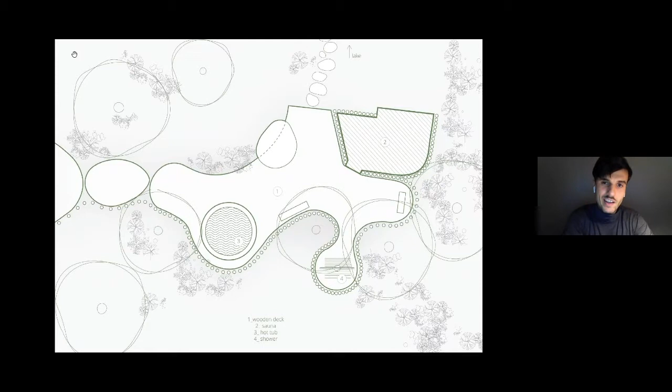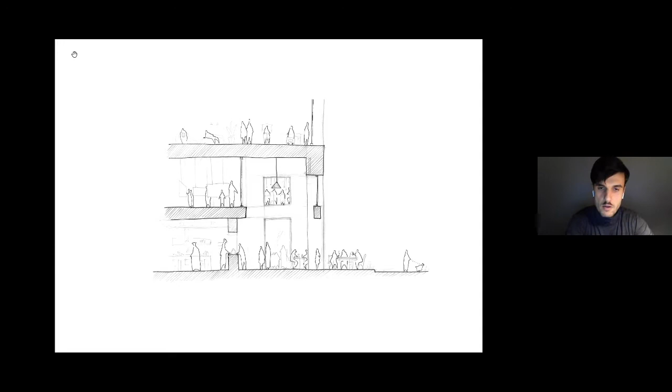So we're dealing with different types of scales, from smaller projects like this one we recently did, an outdoor spa next to a lake that we designed for a hotel nearby in a beautiful natural surrounding. I was inspired by a couple of things, most of all Alvar Aalto's funky shapes of, for example, his glass products. We deal with bigger scale like buildings. This is, for example, a building we won a competition with, a big building in the middle of a park that we decided to structure as a park pavilion with the building on top, so you could walk underneath it. There'll be kiosks and stuff, and then the building was put on top of that. So the bigger scale as well.

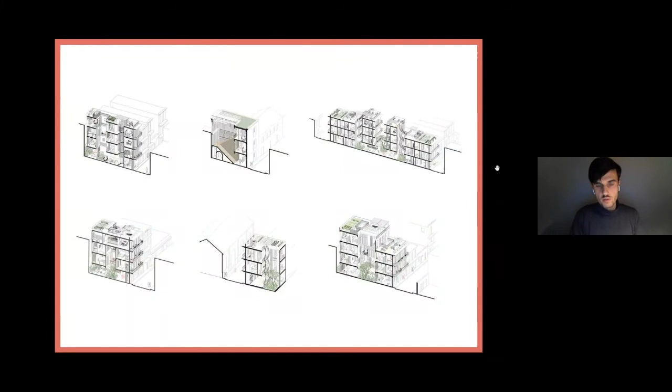And then, as you see, Havana Vieja has a lot of these collapsed buildings, empty plots. We could build them there and not only help Cubans to be connected to the lucrative economy of tourism, but also reconstruct the old town of Havana at the same time. So these plots were addressed with these models, prototypes that I designed for different shapes and sizes, to check how this idea can work spatially. And it's straightforward, very easy. These buildings are also working with Cuban handcraft and passive cooling methods, and other ideas that, again, I took off shelf and tried to figure out which puzzles are gonna work best.

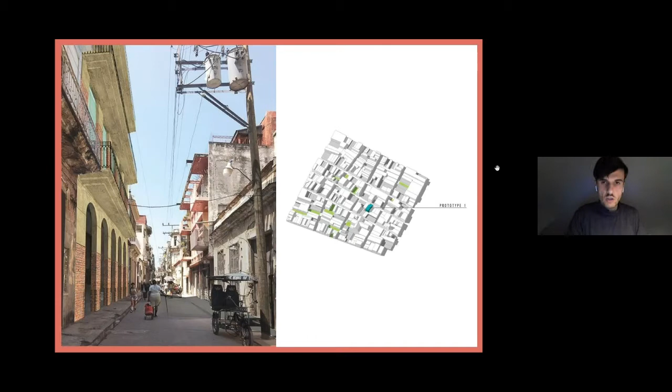Like, for example, Cuban social life happens on the street. So each building got this front colonnade on the bottom, on the front of the building, that during the day can be used by street vendors because they don't actually have a proper place to stay in the old town. But then in the afternoon, these places would turn into zones where you can play domino or just hang out. Spatially very simple.

This is an example of a plan. You can imagine that you have 2 apartments, one here, and 2 hotel units in the middle. And after 7 years, after the loan is paid off, if those families decide that they no longer want to continue that kind of business, they can either create a 3rd apartment and sell it off, or they could incorporate it into their apartment.

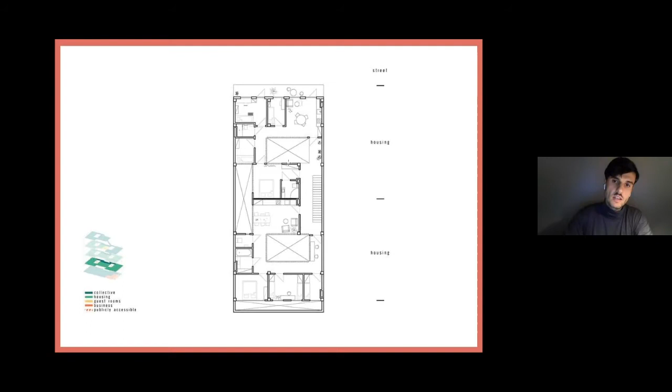When the family is growing, they might need more space. Very simple, no structural changes, just you move a door here and there, and these things can kind of change back and forth between tourism and housing and help to deal with those 2 shortages of hotel units and housing in a more dynamic way.

Again, just taking aesthetically even elements from Cuban architecture that I found the most interesting and putting them back together in a new assemblage that I thought could work nicely. This was the first project that I did this way, that I was looking just for puzzles that I could rearrange in a new way to create new quality, for example, here, new tools to address a kind of social-political problem. I found it to be a successful one.

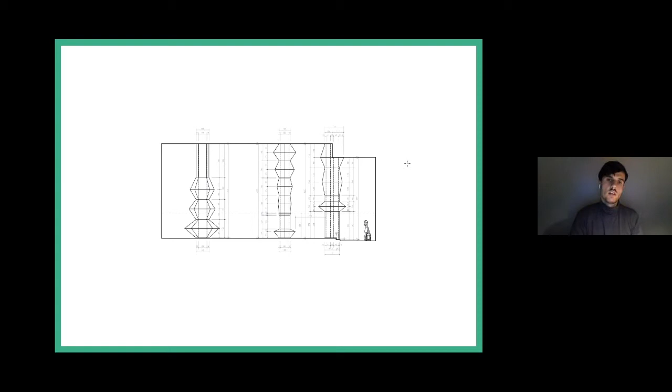And we wrapped these sculptures, these totems, around the structural elements. And this is the outcome. They are almost 9 meters tall, made out of wood and hand painted. It's 400 square meters of hand painted surfaces. We were painting it for 3 months with a big group of volunteers, and organized a lot of video screenings and meetings in the workshop every weekend to talk about environment alongside the work.

So we have topics like quality of air, deforestation, overfishing, disappearance of wildlife, plastic, as I already mentioned, and here in the back is our relation to the environment, our influence on the environment via the choice of the diets that we follow.

Yeah, and they are. We're pretty happy with them, and the project is growing. We're hopefully gonna build more in different cities. This summer we built another one like that in Portugal. You can scan each sculpture to get into the website that will explain everything to you, like what is that sculpture about? You get the links, you get the research. You can go as deep as you want.

And you can see that these are very colorful. So it's kind of like a Trojan horse. You go in because it's exciting, it's fun, it's colorful, but then when you start reading what it means, or a friend tells you, do you know that these actually... it's kind of like a juxtaposition of these two. But we wanted it to be tempting and then kind of surprising later on. These ones, for example, are the ones we built in Portugal this summer for Dos Canais festival in Aveiro.

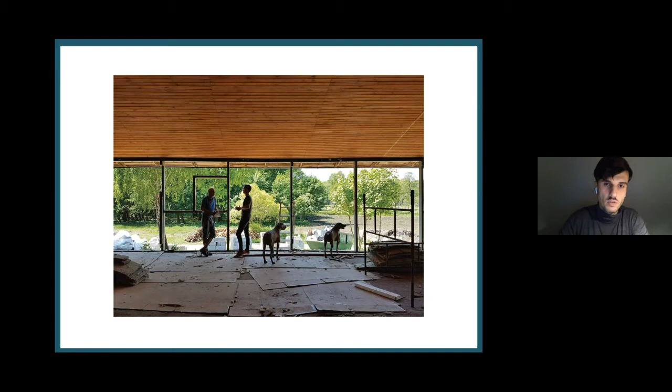So, as I said, this is on hold at the moment. This is what you can see when we took the wall out. This is the structure that we discovered, and this is going to be reinforced with the wooden structure and hopefully finished next year. We had to add a lot of functions inside, but we wanted to keep spatially this typological shape, and we didn't want to lose it. So we decided to take all the functions and put them in the middle of the building and not touch the walls. So we ended up with this box sitting in the middle of the barn.

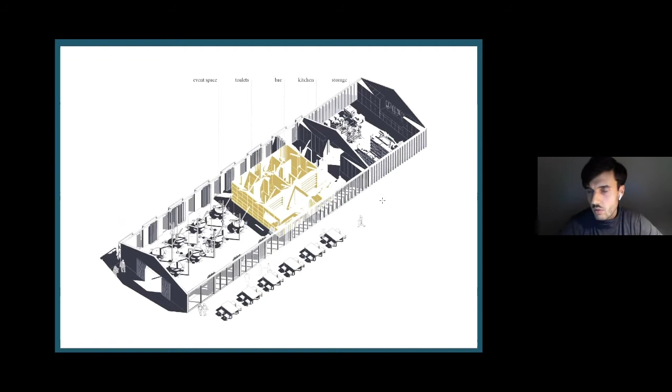The box where you have the bar and the toilet and the kitchen kind of grouped together. And then we asked ourselves, what is a big box sitting in the middle of a barn? And of course, quite a simple, funky, I think, connotation: it's a haystack. So the whole box is going to be built out of hay. It's going to be actually aquariums with hay inside.

But it is a haystack in the middle of a barn that you go into when you want to go to the toilet or buy something from a bar. And to make it a bit more funny, we added a fireplace in a haystack, because why not?

Another one I'm going to share is a project that we're now working on in Tanzania, in Ulyankulu refugee settlement. So I'm a graduate from a school called Wayere, a primary and secondary level school. This school started in the 90s as a scout group that was also a kids theater group, and then morphed into becoming a primary school. And the theater theme remained. Until today, it's a school that teaches kids all the basic stuff that you need program-wise to be a proper school.

This school also uses theater classes to teach you qualities like bravery, honesty, empathy. It's a beautiful, beautiful program of education for kids. And they didn't have a building to start the school in. They got a piece of land from the city, but they had no funds and no building.

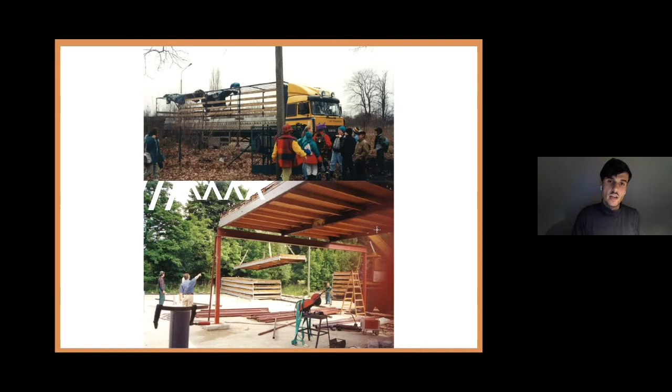So this building that you see here on the picture, and there are the pictures from the construction, was actually a gift from the Netherlands, because they had a temporary school there while they were refurbishing the real one in Eindhoven. After they refurbished that school, they donated the temporary school, and it was brought on trucks in the '90s to Poland and assembled, and it's still being used continuously till today.

So exactly 24 years after the first gift from the Netherlands came to Poland, and we got to enjoy education for so many years in this building thanks to that, we decided as a school to create a foundation. I'm saying we now because I'm a part of the foundation at the moment, but I joined the foundation as an architect after they already decided that there's enough power and this is the time to pass the gesture along. And the refugee settlement in Ulyankulu, Tanzania, was chosen to pass the gesture along and build a school for them.

So I was invited to design that school. It was mostly because at a similar time I finished my Havana project, which was widely published, and I was a graduate of that primary school. Things clicked, and I got that exciting invitation. So I went to Tanzania. These are some pictures from my first trip there, meeting with the client, the plot. It used to be actually a dense forest, but it's now a settlement.

In the 1970s, there was a big conflict between Tutsi and Hutu in Burundi, and a lot of people escaped the genocide there to Tanzania, and they were placed in this area. It was a forested area, but throughout the years, they cut most of the greenery to cook, to build houses, and so on. So it's now a very dry, flat land.

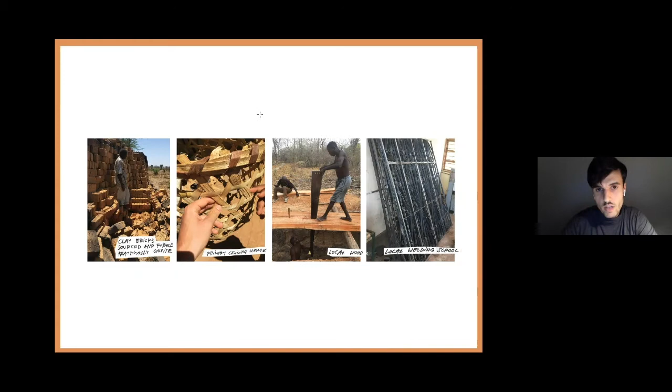And then we diagnosed three main issues when it comes to local school typologies that we wanted to deal with. The first was the fact that classes were really, really hot, overheating very easily. It's almost the equator. Just the corrugated steel sheet on the roof acts like an oven. I checked with the thermometer, the ceiling in the classroom sometimes was up to like 60 centigrade. So kids were falling asleep, and it's not an environment to study in.

Second of all, these buildings are just placed on barren land, so you're either in a very hot classroom or you're outside in the full sun. There is no diversity of spaces, and we believe that different activities are promoted by different kinds of spaces. So that was the second thing we decided that our project should address.

And the third one was the relation between the local community and greenery, because we've seen them cut the trees next to their house just to cook another meal, trees which were giving them shadow, protecting their house from overheating. This relation with nature is not very productive. So the first, the overheating of a classroom, was addressed in quite a technological way. It's an idea that was introduced to us by...

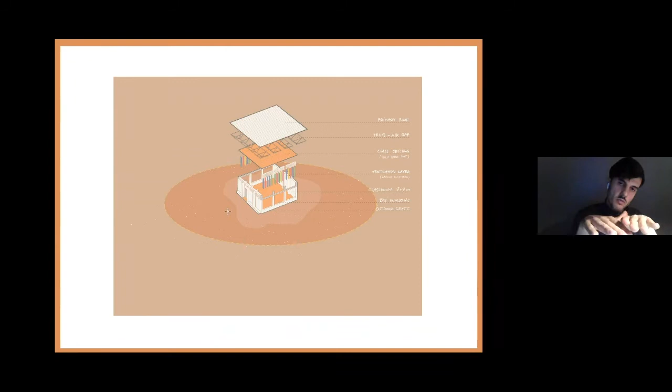It's not our idea. There's an architect called Francis Kere from Burkina Faso. He promoted that idea more internationally of these double roofs, where the first roof keeps the sun and the rain out from the classroom, but then you have some space between the first roof and the ceiling of the classroom where wind can pass through. So there is no direct transmission of that solar energy, of that heat, into the classroom, because there's wind blowing between those two layers.

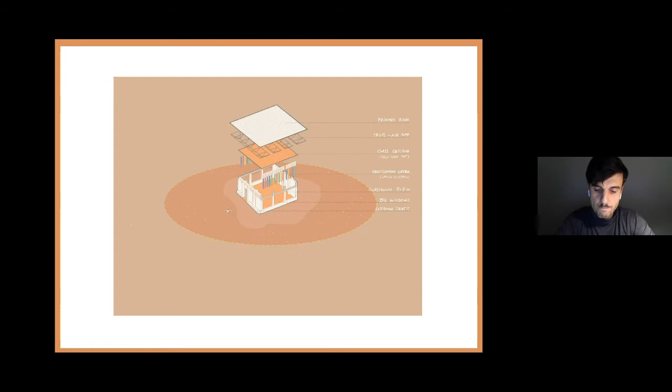And we have also very big windows that allow for cross ventilation, thick foundations that can keep the thermal mass, so they're getting cold during the night, and they are giving back that cold vibe during the day. The next thing that we did was place those classrooms next to greenery, because

trees create cold air. They're not only giving shadow, but they're also actually creating cold air through evaporative cooling. This is why we sweat. When water evaporates, it needs a lot of energy to change from liquid to gas state, and it gets that energy from the air around the particle of water, cooling the air in the process. So you can actually feel the cold air falling down from the tree when it's a very hot summer day

in Ulyankulu. And if you pitch the roof outwards, going up away from the tree, the hot air from the classroom is going to escape that way, sucking in the cold air from underneath the tree into the classroom constantly, creating a passive air conditioning.

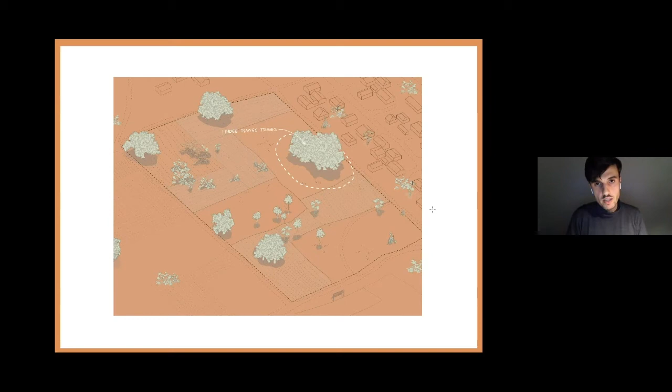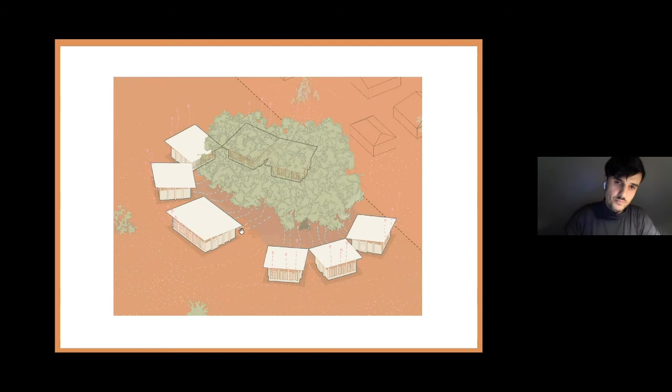So we had this big plot to position the building at, and we chose this biggest group of mango trees for the localization of the school. These are actually 3 big trees that look like one huge tree from a distance, because they connected their branches. So we put all those classrooms around those trees, so each classroom can benefit from that passive cooling method. All of them are one size apart from this big one here, which is the theater classroom. I'll talk about that a little bit more soon.

And we were quite happy with that. We already liked it. You can see also that the roofs connect in such a way that we can collect water from them. We have a water storage tank here. And we're pretty happy. We had the greenery in the center, so we highlighted the importance of it. This big courtyard, a shaded space for kids to enjoy their free time, was there.

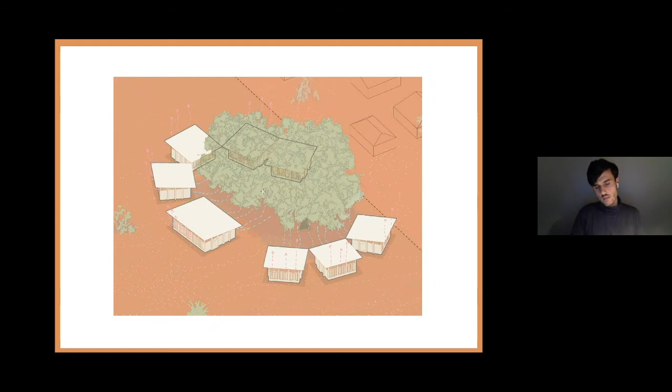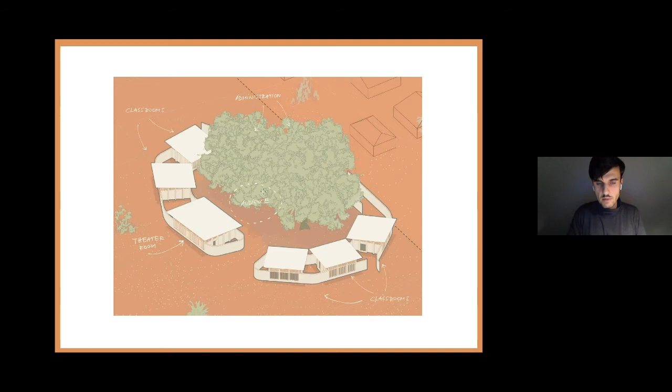But as I said, there was a third problem that we wanted to address, the diversity of spaces. And this was addressed in a way: we chose the cheapest local material, the brick that is actually produced on site. On our site, we have a big hole. We just take some clay. It's formed in those wooden forms, dried in the sun, and then fired in these big piles. So we used this cheapest material, actually just 2% of the whole budget of the project.

This additional wall wraps all the classrooms twice around, and what it creates is every classroom gets a small patio next to it. So instead of having the possibility of being either outside of the classroom or inside of the classroom, we have a much more diverse choice. We can be outside of the school in general. You can enter the central big courtyard that is hopefully going to act like a gathering place, not only for kids, but for the community around it.

We have an ambition that the school should work as a community center as well, especially on the weekends for celebrations or gatherings or discussions. Then you enter a small courtyard, and each courtyard is going to get a playful activity. So this becomes like a continuous playground around those trees and classrooms. And then you enter the classroom. So you have 4 choices of different kinds of spaces.

So if you want to talk one-on-one with a student as a teacher, you can go into a smaller space, have some calm there. If you want to celebrate something, you can go into a big space. If you want to run around, you go outside of the school. There are different ways of using that space because it gives you possibilities.

Yeah, we've built half of it so far. There are some problems now politically there, so we had to stop, because we hoped to finish this school this year, but unfortunately COVID and elections in Tanzania, yeah, there are some complications. But hopefully we're going to finish that soon. Half of it is already built.

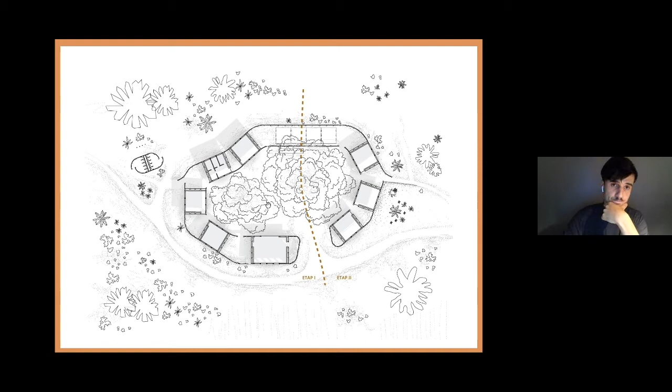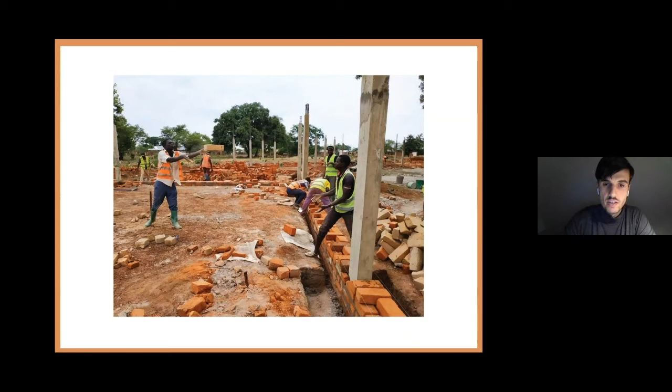We actually had this idea to make it as ornamental and playful as we can. So we burned half of the bricks on our site, where we had this darker reddish clay, but half of them we asked to be fired in a nearby valley, like 2 kilometers away, where the clay is beige. So we have more of a playful quality to the wall itself.

We also tried to build it from red brick up to lighter brick on the top, so it would again create this kind of gradient. I think we just like gradients. Hopefully you can see that a little bit. Maybe it didn't work out as strongly as we wanted, but the playful, colorful quality to the wall is there either way.

As you can see, we've built some of the classrooms already. We managed to get these curves that we wanted. This is the first roof. There will be a ceiling over a classroom as well, and the wind will help to ventilate. So the classrooms are already being used, but we still need some work to finish. Hopefully, when we're done, this is more or less what it's going to look like.

The wall that is surrounding the school is not supposed to be a wall as a barrier. It's more like a definition of space. So we punctured it with little playful holes so kids can go in and out of the school from every direction. They can jump in, climb in, crawl in, or use the main entrance. It's your choice. It's about freedom. It's about possibilities. It's about having fun.

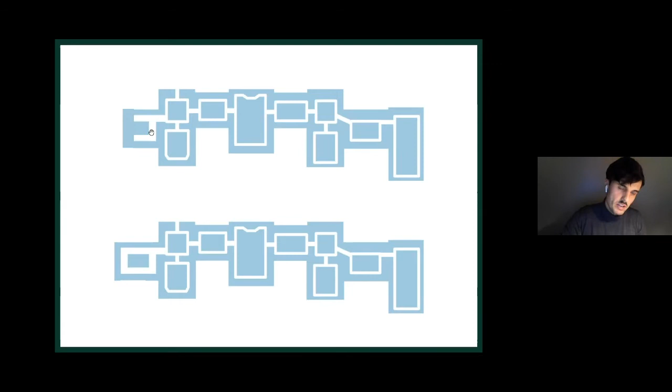So first of all, you're supposed to sit when you're watching an aquarium. That was my experience, and I was like, this is important. And the way it was designed historically, you kind of walked, and all the pavilions in the whole Palm House are designed as a loop. Only the aquarium pavilion was like a dead-end street. So the first decision was to correct that and create the same circulatory experience.

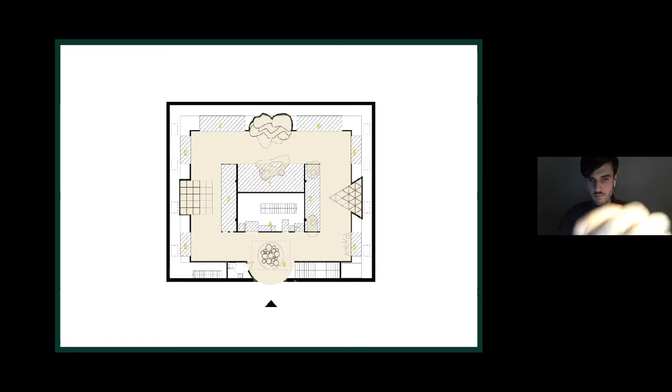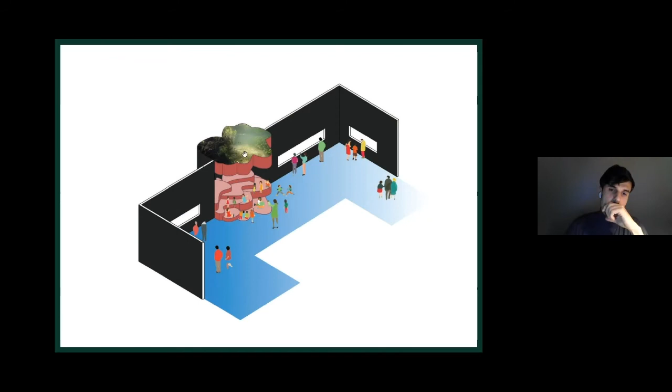But then we didn't want people to walk and look at the aquariums. So we decided to create these four big auditoriums for the aquariums. We gave each of them a different shape, color and quality based on the biotope of the aquarium they were put in front of. A lot of the inspiration you will see here came from another point of reference that we chose, Pipilotti Rist and her installations, because going to her shows gives me personally this experience of being very immersed in something and often feeling literally underwater. So there's a lot of rip-off ideas from Pipilotti Rist here.

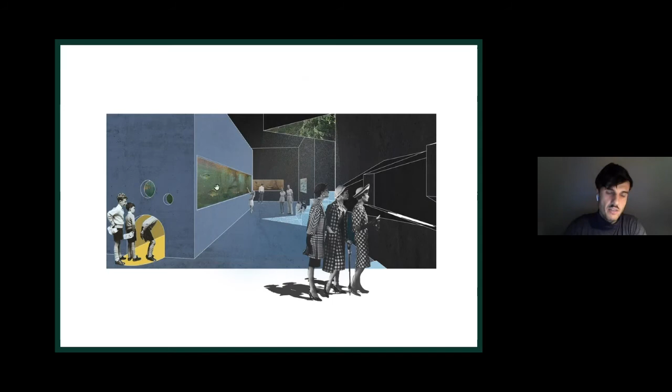We created these projections on the ceiling, and these places where you sit are just as if you were on a piece of rock or in between some plants or driftwood. You can go underneath aquariums, you can crawl as a kid, you can lay on the ground and look up to the ceiling. You have that projection on the ceiling, which is also projecting through the screen to the floor. So you look at fish, you have projections on you, you have the water surface above you, you're sitting on some kind of weird underwater structure. This was the idea.

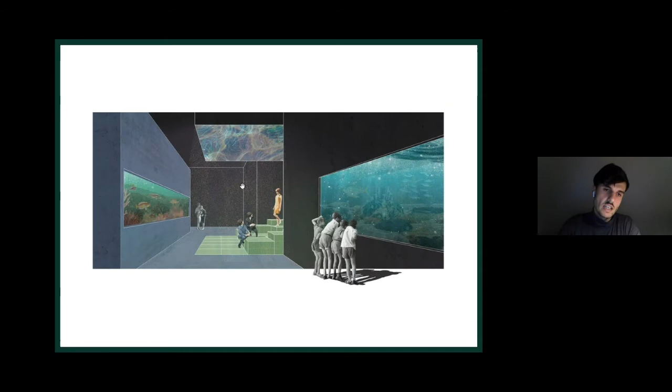We even went down to such a detail that we designed each aquarium choosing what kind of fish is supposed to be there, but this was just me nerding out.

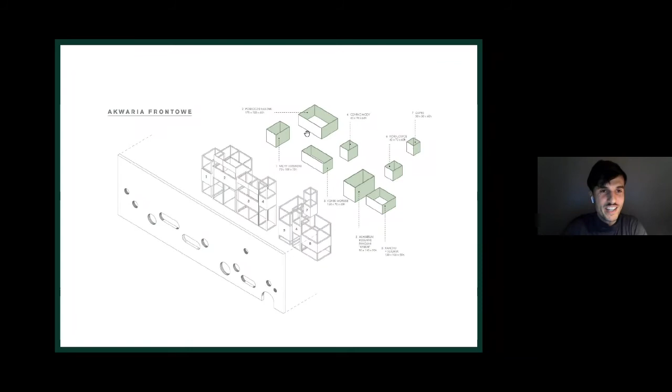One more sculptural project that I would like to share with you guys is the one I did in Portugal this year, called Long Live the Palm. And this is going to be based on a short story I'm going to share with you. It's quite a random happening that I ended up doing that project. I came there to build totems for Aveiro Festival, but then it was COVID reality, there was a lockdown in Poland, so I was very happy to stay longer in Portugal, and I was offered to stay there for an art residency.

And then I had a chance to do another project, and on a phone call with the curator of that residency before I went there, Paulina mentioned a couple of topics I could look into, and one of them was this main square in the town of Águeda, which they care a lot about. It's next to the plaza where all the concerts and things are happening. People go there very often, and there were these palm trees that came to Águeda 15 years ago. They planted them in front of the court. They grew a bit too big, so they replanted them in that main square, and they now died. And everybody's very upset about it because it's this small town, and they want their main square to look a certain way.